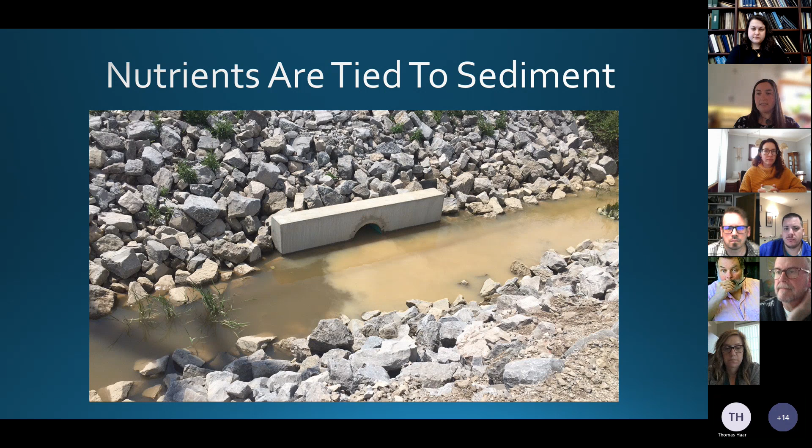And road salt is a major pollutant. Once it gets in the water, it never goes away. So the sediment, a lot of nutrients are tied to sediment, and nutrients are what cause the algal blooms that we see in the summertime, our nitrogen, our phosphorus. Those are really bonded to those soil particles. So a good majority of these minimum controls that municipalities have to follow are regarding sediment to keep it in its place so it doesn't end up in the water.

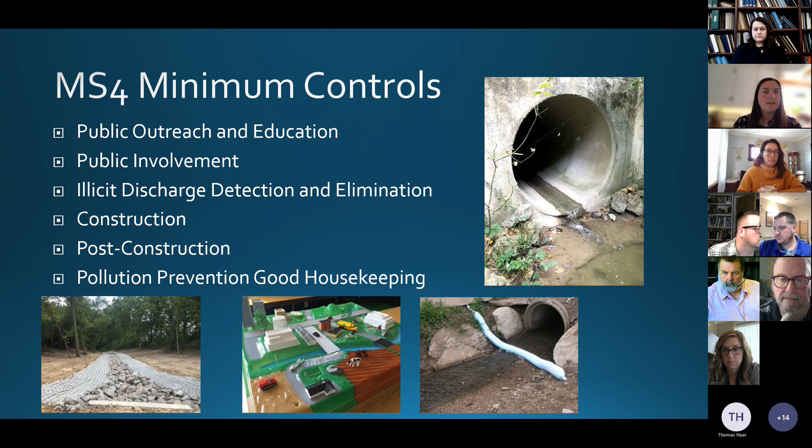Right. So here are the MS4 minimum controls that Ohio EPA came up with for our smaller MS4s. Toledo, for example, still has to follow these same minimum controls, but they have a couple extra. And let's see, we have public outreach and education, we'll start with that one.

So I personally, as part of my job role, will go out and do education programs for the public within the city of Perrysburg, talking about sediment and soil erosion, talking about, that's our Enviroscape model there in the middle, and all of the different pollutants that get in our environment and how to take care of them. Making sure that the public has an idea of what to look out for, because a lot of them don't really have a concept of stormwater pollution.

A quick shout out to a couple of the programs regionally that are happening. Clear Choices Clean Water, trying to get people to pledge to take these certain efforts like picking up their waste, not fertilizing their lawns as much, volunteering, a lot of different aspects there. It's a great website. You should check it out.

And also starting in the last year is a mass media campaign with WTOL that's being headed up by the Lucas County Engineer's Office, trying to put a lot of that information, that public outreach, electronically so that people see it on their phones and commercials on TV to get the message out there. MS4s are required to reach a certain percentage of their population every year. And so this is one of the ways that you can kind of reach those numbers.

All right, this is a separate minimum control other than outreach and education, public involvement, getting the public to come to public meetings, pick up trash, rain barrel workshops, storm drain marking, trying to get the public involved in your stormwater management plan as much as possible, physically out there doing things.

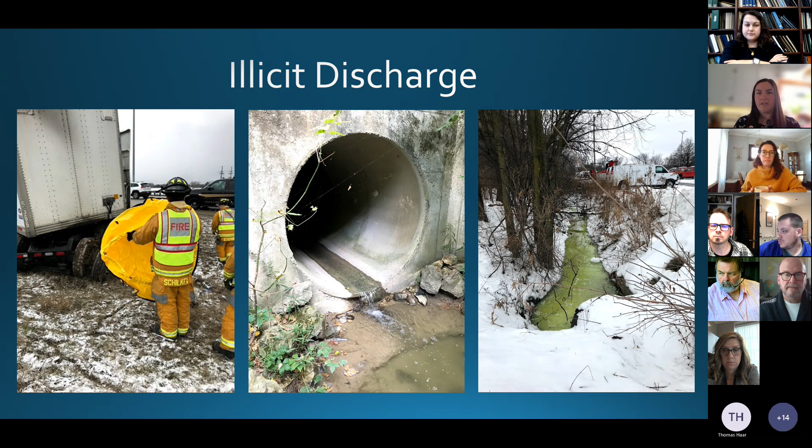And as you can see on the right picture, we get citizen complaints, because if you see something, you should say something. If you have a stormwater person in your jurisdiction, you want to make sure that people know to call them when they find something. Our fire department and police department call me when people call in complaints of fish kills or discoloration, sheens, all of those different things.

Right. So next is construction. If you remember, I said nutrients are tied to sediment. This is something that applies to not just the regulated MS4 community, but any community. If you have development happening, you want to make sure that they are taking into account how much water is coming off of all of that new paved surface, all those roofs. If you're going to increase all of the flow off of a piece of property, is your storm system going to be able to take all of that water? Is it going to overflow?

And some communities have, for example, we have a 100-year storm requirement. Others have a 25-year storm requirement, but somebody should be looking at those construction plans when they come in, whether it's from the MS4 perspective or from a flooding water quantity perspective, to make sure that those requirements are met. So there are local detention requirements and Ohio EPA construction requirements. And enforcement is part of that too. If whoever is doing the construction isn't doing what they're supposed to do, you have to be able to enforce on them, usually with some type of information in your municipal code.

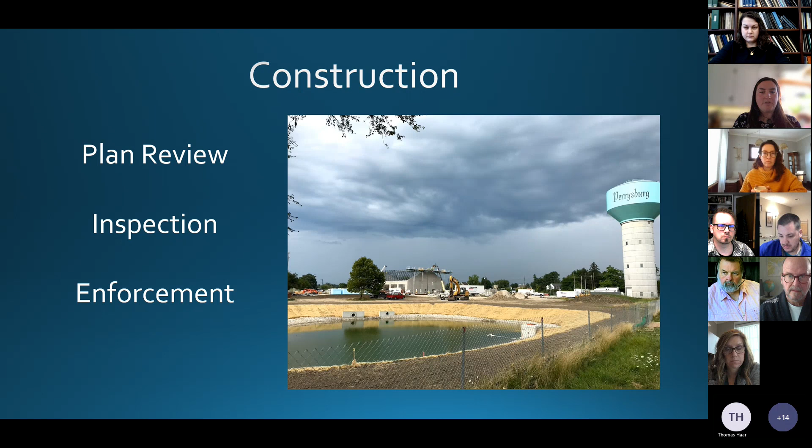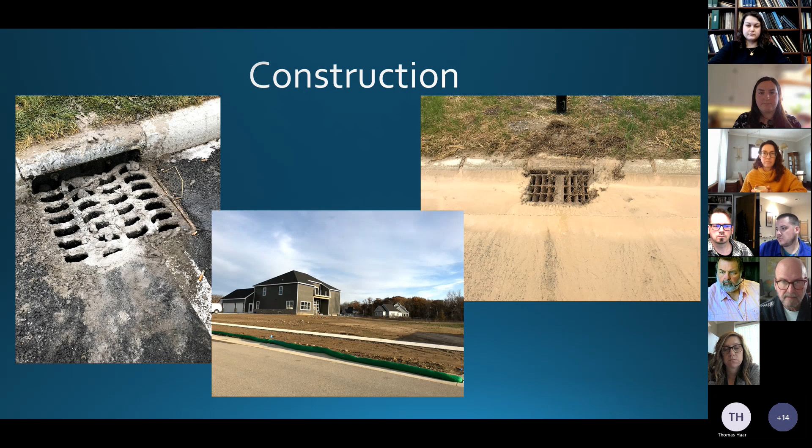And the last minimum control, pollution prevention, good housekeeping. This is working directly with your facilities, whether it's your streets department, your sewer department, whatever you might have in your jurisdiction, to make sure that whatever activities they're doing aren't going to negatively impact your stormwater. So a street sweeping program that collects pollutants out of your storm sewer system. Remember, the street is part of the storm sewer system. Anything that ends up on a street with a catch basin ends up in our water. So sweeping the street, collecting leaves, brush, and anything like that you can think of, not applying too much salt.

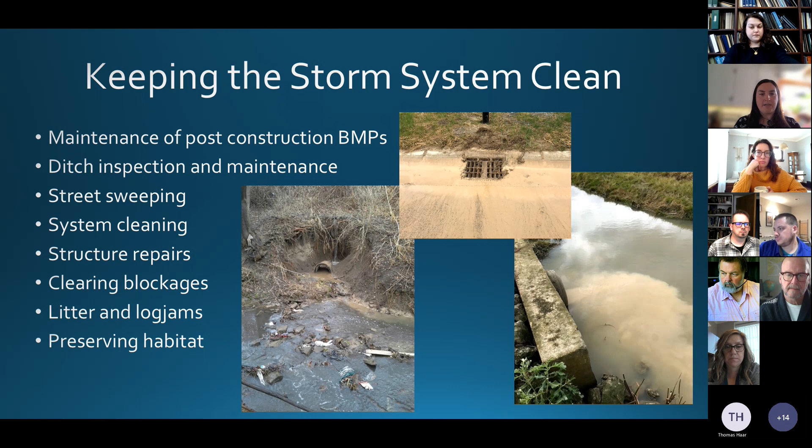Litter and log jams, as you can see in that left photo. No matter what you do, no matter how much you try and trap trash, sometimes a windstorm will blow trash out of somebody's toter, even if that's where it started, and it'll end up in a body of water eventually. It's a low point, it flows to one area, and be prepared to clean those up if it's gonna block up your system. And like I said, preserving that habitat if you can while you're doing your maintenance operations.

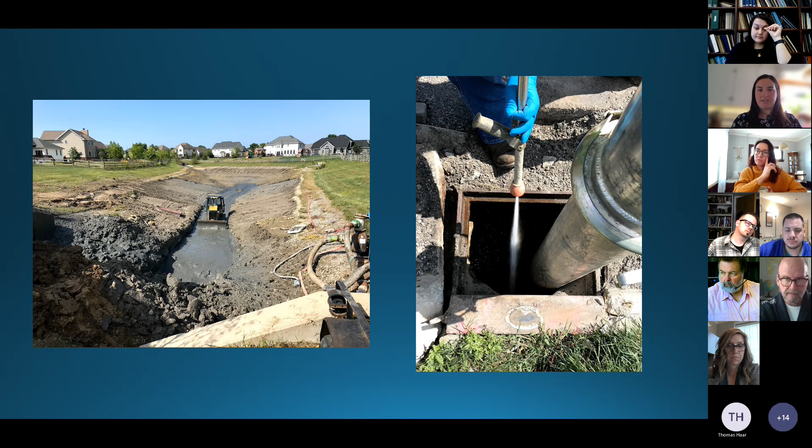And here's some examples of jetting and vacuuming the catch basin on the right-hand side, and then how expensive it is. If you look at the photo on the left in one of our subdivisions where the pond had to be drained and completely dredged. You have to think about where are those things going to go. It's a lot, but if you can prevent the sediments getting into those structures initially, you can save yourself a lot of time.

All right, and back to the why. It's required by a lot of government agencies. We have some more exciting things coming down the pipe, so to speak, with the Maumee TMDL. If you haven't heard about that, that's going to potentially change a lot of things for our MS4s, our wastewater treatment plants, for a lot of different areas of our jurisdictions to try and help keep Lake Erie clean. That's a total maximum daily load if you don't know the TMDL acronym, because we have too much phosphorus going into the lake and we need to reduce that. And some of these things that I've listed today are ways you can do that. So those requirements may become more stringent because we want to improve water quality.

We don't want to smother our macroinvertebrates and disrupt our food chain. I know here in Perrysburg, a lot of our economic benefits this time of year rely on the walleye run. And if the walleye run isn't able to happen in the Maumee River because we have extremely polluted the Maumee and there's no areas for the fish to swim up to, we feel that, not just in the fish, but in the visitors. People come from all over the country to visit the walleye run.

Flooding and clogged storm lines, you'll get a lot of calls from a lot of residents if you don't maintain your storm sewer system. And we got to maintain our structures. We have a fiscal responsibility to our citizens. They expect us to take care of infrastructure, and we should. And having pride in your community, you want to have a clean, safe place to live. Well, that's the end of my spiel. So now that we know what we need to do, how do we pay for it?

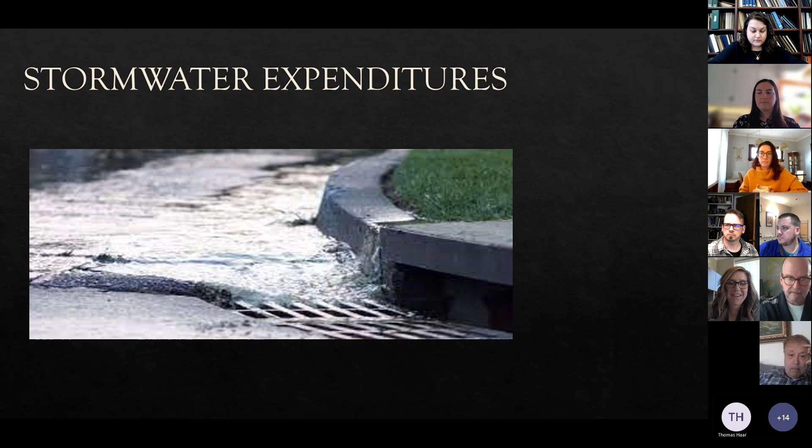So next slide. So specifically, what kind of expenditures are there that would be appropriate for stormwater management? Similar to other departments, there's operating costs, capital, and possibly debt cost as well. So next slide, please. So some of you may be incurring stormwater management costs already and you may not realize it. A position dedicated to stormwater management, that would be obvious to charge that to a stormwater fund.

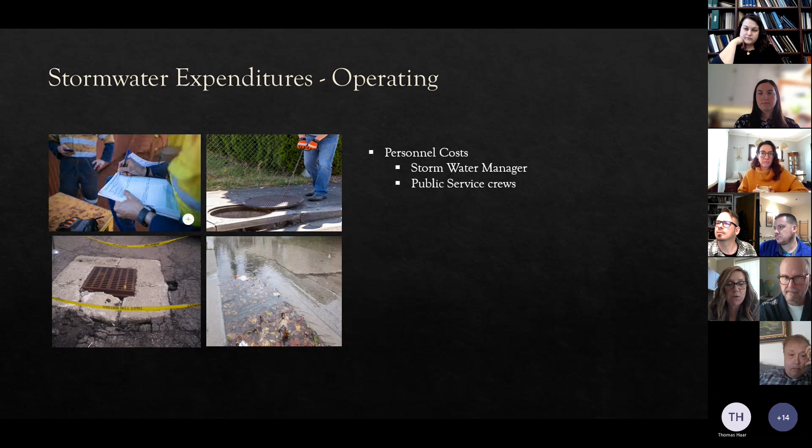But what about your public service crews? They spend time cleaning out catch basins with leaf pickup, ditch maintenance, all those items that Lauren touched on already. So some of their wages could certainly be allocated to a stormwater fund if you have the revenue source. For auditing purposes, you would certainly want to document how you determine the allocation for the public service crew wages.

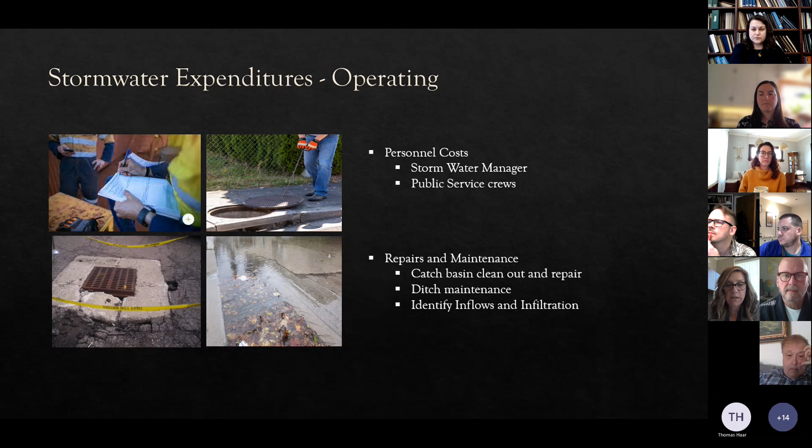So along with personnel costs for operating, there's of course repairs and maintenance expenditures, as well as Lauren indicated, cleaning out your catch basins, repairing those catch basins, identifying inflows, identifying if there's an infiltration 3 days after a storm, those sort of things. After operating, then you could identify capital. So next slide.

So as well as vehicle and equipment purchases. So if your municipality has a leaf truck, that would be appropriate to charge to a stormwater fund, a street sweeper, a Vactor truck. A Vactor truck could be used across multiple departments. So depending on your specific situation with your municipality, you might want to allocate some of those costs as well.

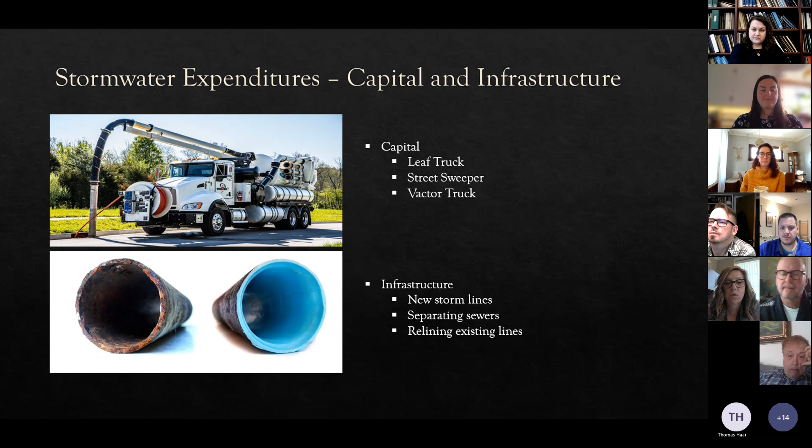So the first revenue item is an assessment district. This would be for a specific project. So maybe placing in brand new storm lines in a neighborhood that was unsewered before. So you would certainly need to get a cost for that, identify the specific parcels that would benefit from that project, determine how much the city is going to pick up or how much is going to be passed along

to those parcels, determine how long the assessment period would be, and all the general assessment rules like notifying the property owners would apply. You can refer to ORC 727 or your charter for more specific details, but essentially you would go through that whole process and then certify it to the county auditor to place on your property tax duplicate.

So the next revenue item would be your stormwater utility. So with a stormwater utility, essentially you're establishing a baseline through an equivalent residential unit. So a unit of measurement of the area of impervious square footage of a typical residence. And I do want to point out, this is very entity specific. So there's not a right way or wrong way. There's multiple ways to look at the stormwater utility and calculate the ERU and develop the whole program.

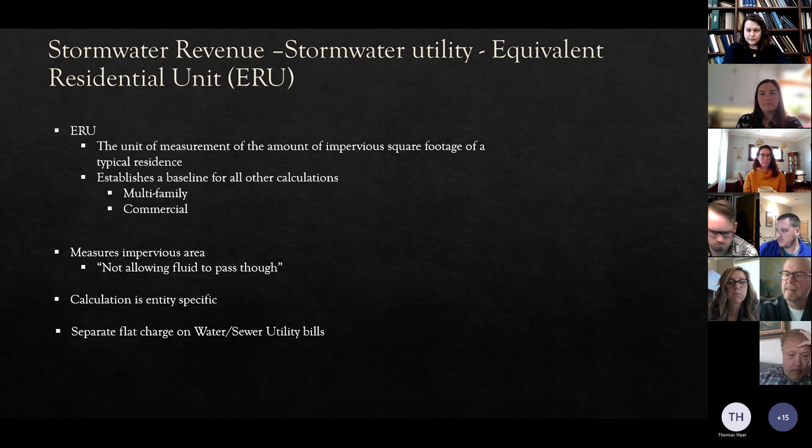But essentially you're establishing a baseline of a measurement of a specific impervious area. And I can go through a few examples here shortly. But the ERU is a baseline for all other impervious area calculations. So once that ERU is calculated, the impervious area is then measured and then calculated from the base of one ERU. And then it typically would be billed through utility.

The stormwater utility would be established through your council, of course. A new fund would need to be created, and you might want to contract with an engineering firm to assist with measuring the impervious area for each parcel, or you could potentially manage it in-house, just depending on your staffing and depending on the amount of parcels that you have.

So the examples up here, these are just 2 examples I've had experience with. In the one example, one ERU is identified as 3,460 square feet. And this particular one had a $3 charge per ERU. So all residential properties for this entity were charged $3 a month. And then the commercial properties were measured for impervious area. If it was beyond 3,460 square feet, it was calculated at $3 per ERU and then billed monthly.

So that first example is a flat rate for residential, regardless of the property size, regardless of the true impervious area. And in the next example, there's a unique ERU for whether it's a single family home, a duplex, triplex, residential properties, and it also depends on the lot size, an acre, more or less than an acre. And for that one, the baseline is 2,600 square feet of impervious area that you would then use to calculate commercial properties.

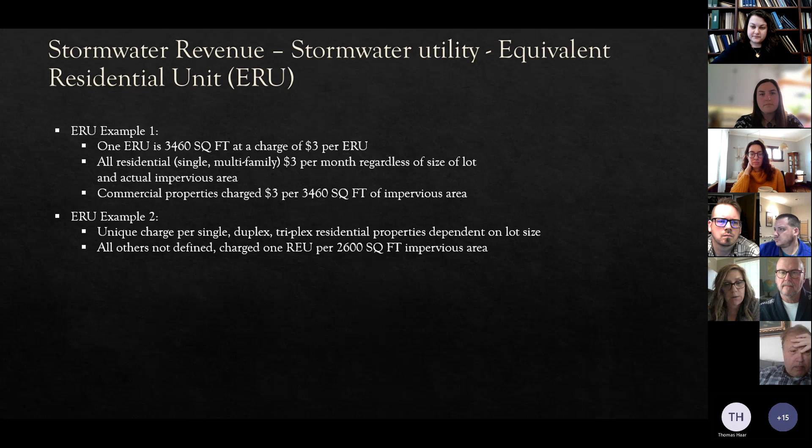So like I said, there's not a right or wrong way to do that. It's very entity specific. It would depend on your entity size and parcels and makeup. So the next method, you could really look at your financial need. So you would want to essentially work backwards. I would recommend that you forecast out your operating costs and capital costs over 5 to 10 years, and work backwards to what you need to generate to meet your entity's goals.

And those are very, very basic, very simple calculations. Like I said, it's very entity specific. So you would have to look at your needs and then sort of work backwards from there.

And when you're developing a stormwater utility from scratch, you would really want to look at what you could offer: sort of stormwater solutions, such as retention and detention ponds, a discount for stormwater swales. Lauren indicated some green infrastructure, bioswales. So that can be all built into the stormwater utility code, or maybe they're already existing in your existing code.

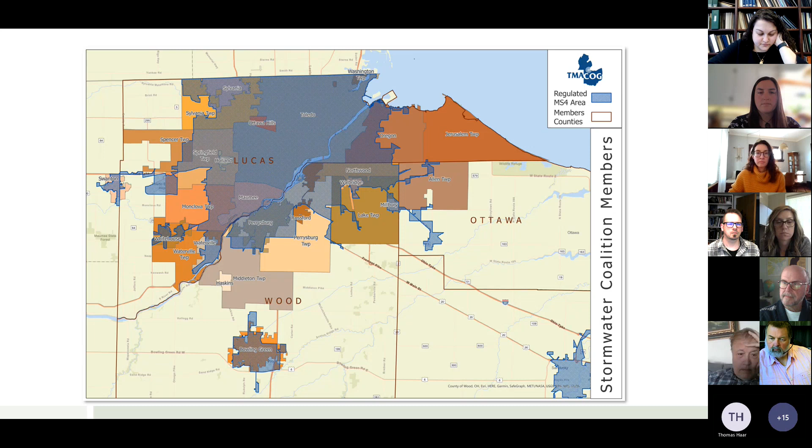So the map I'm showing here does zoom out on that census urbanized area a bit. I wanted to show most of the area that I think most of the attendees here today are coming from. So most of the communities outlined here in blue are under the stormwater permit, the stormwater NPDES permit, but the smaller communities are not. So you might be asking yourself, how do I know if my community needs a permit, or how do I know if my community has an MS4 permit?

Well, OEPA will let you know. So they will notify you. If you're located, again, within the urbanized area, likely you should be regulated, but your population also does need to meet a certain size criteria if you're not connected to the main Toledo metropolitan area. So I don't know if I have a pointer here, but some of the smaller outlying communities that are not contiguous with the Toledo metro area may or may not be regulated. Ohio EPA also has other water quality based criteria for making that determination as well.

So Lauren already gave a great overview of all of the permitting requirements that your jurisdiction will fall under if you are regulated. So I won't get into the details here, but as she clearly laid out, meeting these requirements really is a heavy lift, and it requires funding and staffing with diverse backgrounds and diverse expertise. So building, operating, and maintaining your physical stormwater infrastructure is likely the largest cost, but the staffing infrastructure is also a large component.

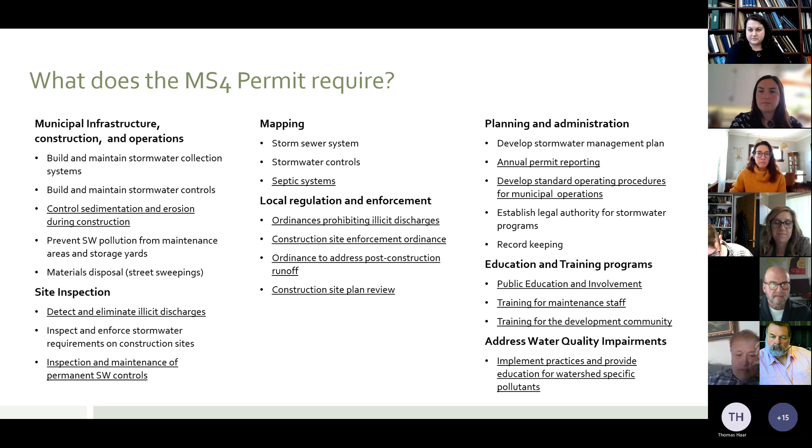So the Stormwater Coalition, we have shortened that to the acronym SWC. We call it SWIC. How can SWIC help? Well, TMACOG offers staff support through the Stormwater Coalition. The Stormwater Coalition is a separate assessment on your regular TMACOG dues. So this is all based on the number of parcels that you have in your jurisdiction. So that pays for TMACOG staff support who coordinate this network of regional partners. And we also work with other community partners like the Home Builders Association and other TMACOG members in the development and engineering field as well.

We're in some cases able to help coordinate on collaborative permit compliance. One of the great things that we've been able to do is leverage these partnerships to bring in additional funding to the program so that we can offer additional services and develop additional products through the Stormwater program. And I'll give a couple examples of those later. And when we've got people together, we are a common voice for concerns related to the permit. So our members have been able to provide early stakeholder feedback when Ohio EPA is proposing changes to the permit.

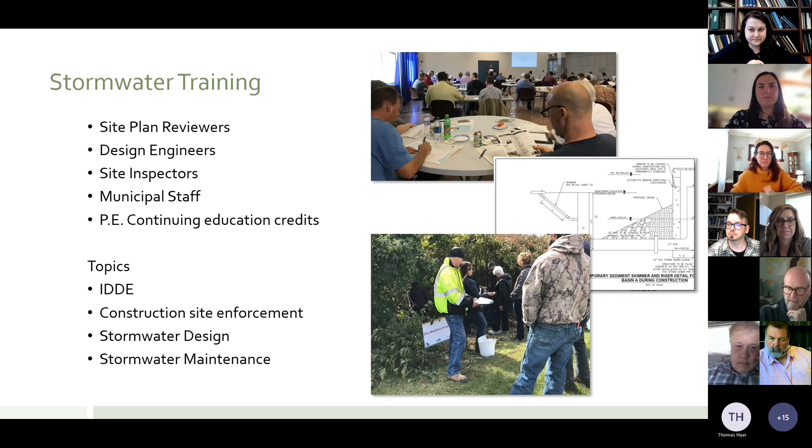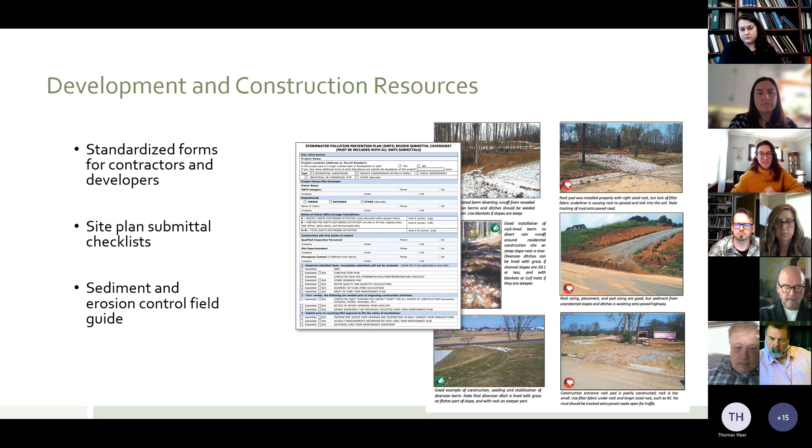And then we also offer help as far as program administration. So we have put together model ordinances with our Stormwater Coalition members, developed standard operating procedures. TMACOG staff can come out to your jurisdiction and do a stormwater program review to prepare you for an Ohio EPA audit. And we provide some annual reporting materials.

So if you're wondering how you can be involved, if you're not already, start thinking about coming to Stormwater Coalition meetings. Stormwater Coalition meets quarterly and discusses all of these topics. Really, though, the driving force behind the Stormwater Coalition is the Stormwater Action Group. This is the technical advisory committee that really does drive the Stormwater Coalition. So this is where most of the work happens with the stormwater program.